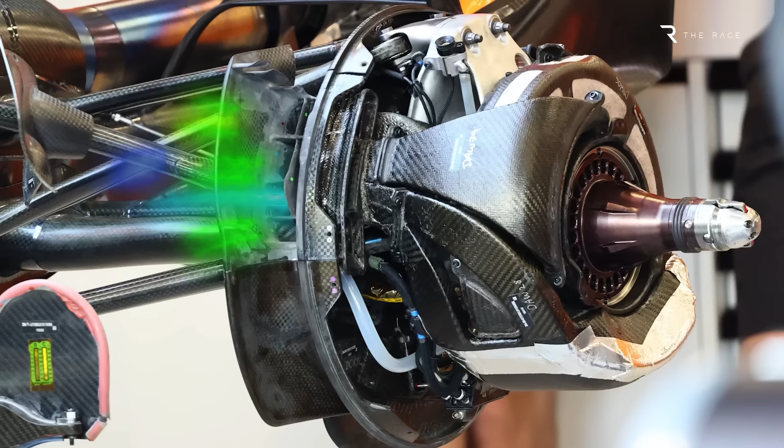Just when we thought it was case closed over McLaren's ingenious but legal brake system design, there's now been a fresh flare-up in its ongoing battle with Red Bull over exactly how McLaren manages rear tyre temperatures better than anyone else. This latest chapter has exposed for the first time some of the wildest theories that Red Bull has come up with to explain what McLaren is up to.

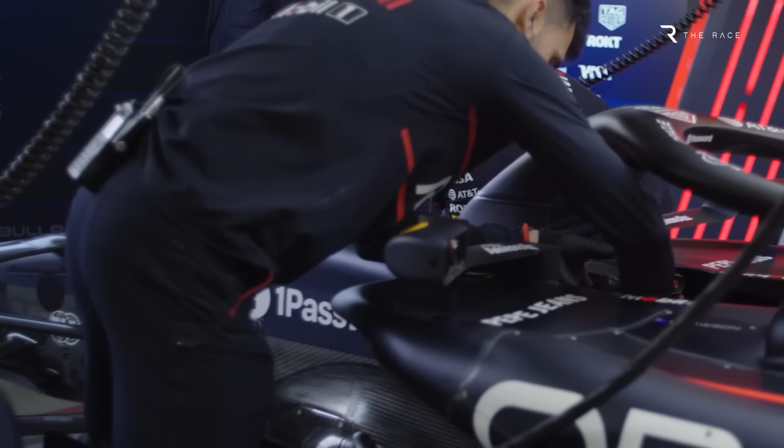But now, amid the chase for answers on what exactly McLaren is doing, one fascinating use of technology has not been immediately ruled out as illegal by the FIA.

The chase for answers about why Red Bull beat McLaren at its own game at Imola has taken a fresh twist, with it now emerging that the FIA issued 2 of its advisory technical directives in the days leading up to the Emilia-Romagna Grand Prix.

Red Bull insiders think it's no coincidence that the FIA's intervention in clarifying how it interprets the rules came ahead of a weekend where McLaren's form appeared to fall away.

But McLaren sees things differently, insisting the car it ran at Imola was not impacted at all by the TDs the FIA issued. McLaren feels rivals are mistaken in thinking it has some magic bullet solution that's made the MCL39 such a potent force in F1. It's repeatedly stated any advantage it has this year is simply down to good engineering.

The pre-Imola technical directives covered 2 separate areas. One, clarifying the materials and mounting of the skid blocks so teams can't circumvent the probe tests used to measure the depth of the plank after races.

You may remember this flared up quite a bit in mid-2022, and there have been several exclusions for excessive plank wear since, most recently on Lewis Hamilton's Ferrari in China.

Quite who this TD was aimed at is unknown, but any team exploiting the skids would have had to raise their car up for Imola. Senior sources at McLaren were clear they weren't forced to make any changes to their car, nor the way it was run.

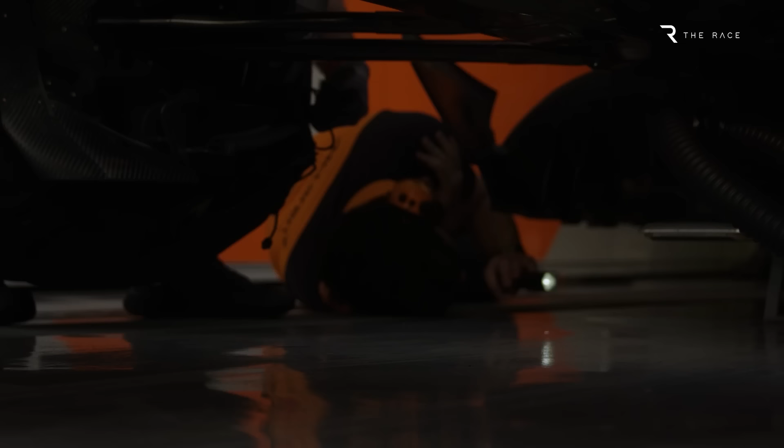Of greater interest and more significance in terms of the season-long attention there's been on McLaren's advantage in controlling tyre temperatures was the second Imola TD.

This document was different to the skid block one in that it didn't offer any formal guidance or changes to previous advice about how the governing body would interpret the current regulations.

Instead, it was the publication of a communication between the governing body and Red Bull relating to some questions posed by Red Bull about devices and procedures that could potentially be allowed to help with tyre cooling.

This type of dialogue between teams and the governing body, where ideas are suggested only to be ruled out, is frequently used to smoke out concepts that rivals could be using to exploit grey areas in the regulations. With the FIA often publishing to all teams its guidance under such circumstances, this effectively becomes a formal notification about systems or procedures which the FIA feels teams would not be allowed to run.

So, by Red Bull querying design ideas that it would like to introduce and being told no, this effectively stops any other teams continuing to run any similar system if that's what they've been doing up to that point.

It's not clear if this has actually happened, that what Red Bull has been told definitely isn't okay has changed what any other teams were doing. But Red Bull definitely has suspicions that something has changed on the McLaren since Miami that resulted in that car losing its massive advantage in managing rear tyre temperatures.

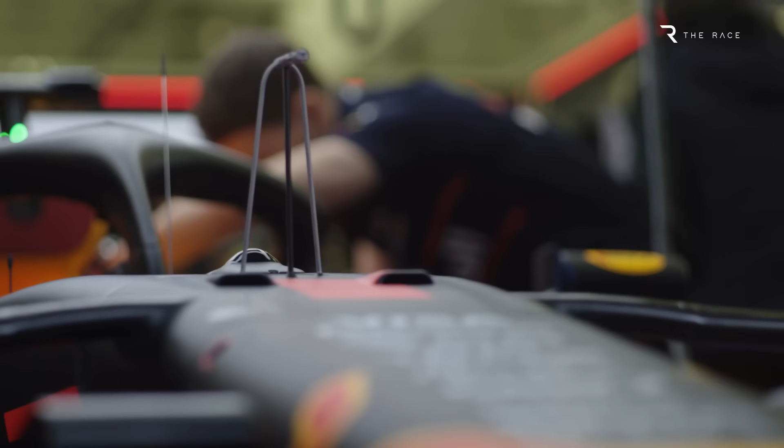The correspondence is fascinating as it offers us the first proper insight from a competitor about theories on what McLaren could have been up to and what the FIA thinks about some of these design ideas.

The Race has seen a copy of this technical directive, which includes a host of questions from Red Bull about design ideas and procedures relating to tyre cooling, plus some responses from the FIA on what it thinks is and isn't allowed. One area of discussion regards clarification about the use of gases within the tyre, and especially the circumstances by which teams can switch out the Pirelli-supplied air.

The FIA allows, through a combination of the technical regulations and previous technical directives, just one exchange of gas. Questions are asked about teams doing this exchange from one of their own reservoirs, taken from Pirelli sources, which the FIA says is allowed. Further questions are asked about whether the rules that state any form of cooling that may affect the tyre or wheel whilst the car is in the garage or pit lane is prohibited cover what teams can do on the grid.

The idea here would obviously be for a team to exploit this and deploy some cooling tricks once the cars are on the grid that would help better manage tyres.

While the FIA accepts the grid is not explicitly mentioned in the regulations, it suggests that cooling or heating of wheels to control temperatures on the grid would fall foul of Article 10.8.4d, which outlaws anything that helps teams warm up or maintain tyre temperatures.

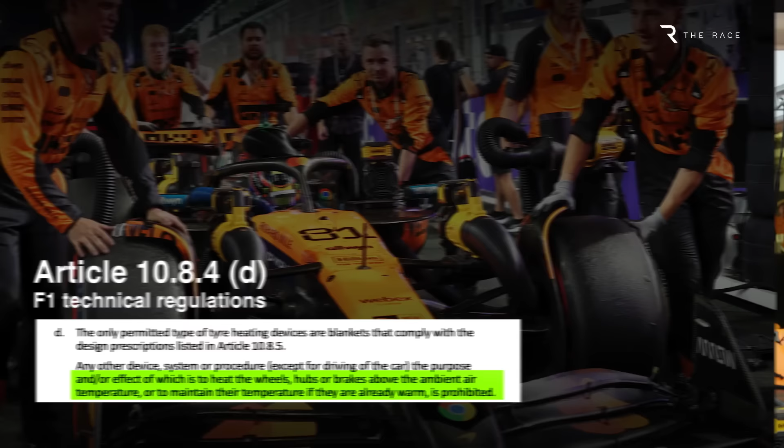Questions are also asked about teams cooling or heating their garages to influence temperatures, with the FIA stating it will not ban the use of air conditioning devices to maintain a comfortable work environment. However, where it found that this activity was being used to influence tyre temperatures, then the FIA would step in.

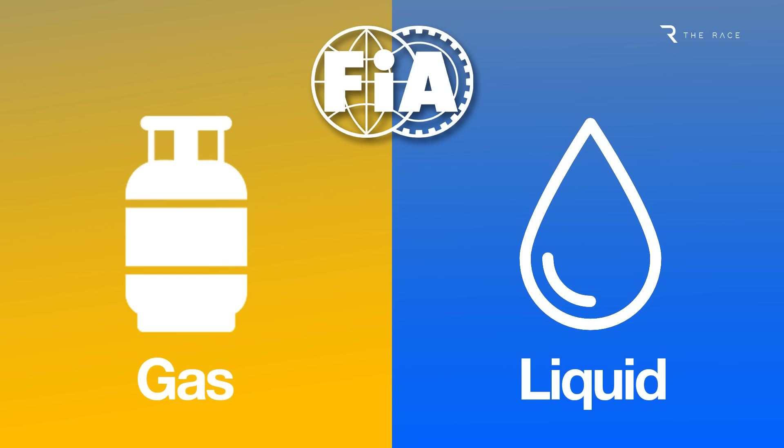Another section of this discussion involves a clarification of the use of any fluids within the wheel assembly to help better manage temperatures. The FIA divides this up into two separate topics, gas and liquid. It states that the use of gas in the wheel drums is allowed, providing the wheel design complies with the regulations and no other rules are contravened.

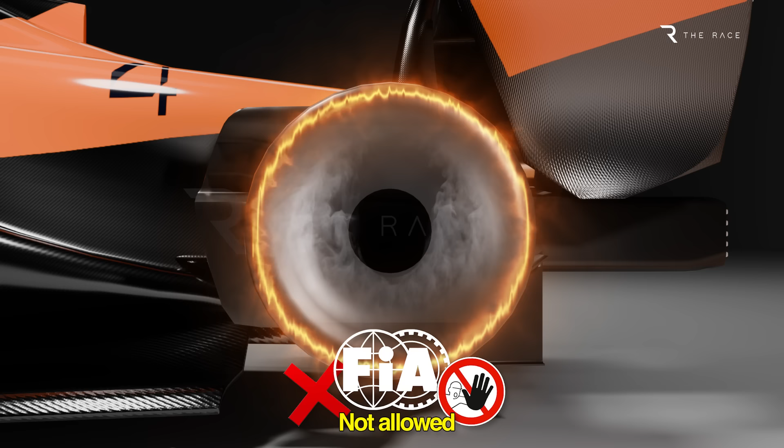However, any significant leakages of gas from the wheel drum to help cool or warm the wheel rim would not be allowed. In terms of liquids, the FIA is clear that these are not allowed to be within the wheel drum, with the exception of the brake's hydraulic systems.

The most fascinating part of this correspondence between Red Bull and the FIA is some of the design ideas put forward as ways that could potentially help with managing tyre temperatures, most of which refer to some kind of liquid being used or transferred to the wheel assembly to aid cooling. Here, we can reveal these suggestions for the first time.

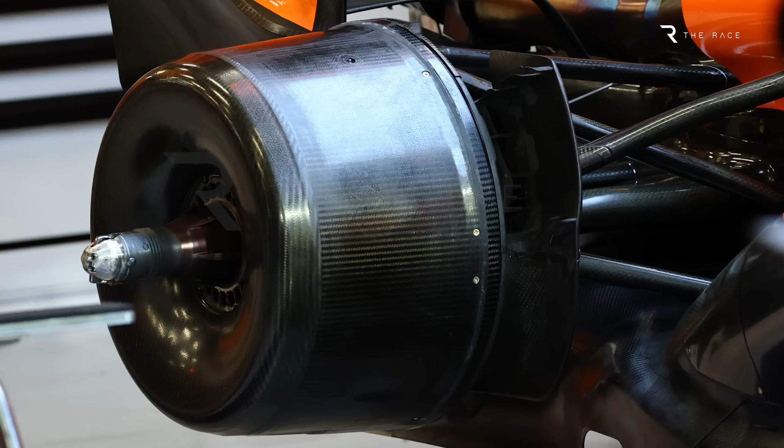Fluid-filled skins in the wheel assembly. One idea is to enclose a cooling fluid within laminate skins of the wheel bodywork. There would be no duty of the team under the technical regulations to explain the purpose of this fluid, but it would essentially be there to effect the heat transfer between the skins of the wheel bodywork.

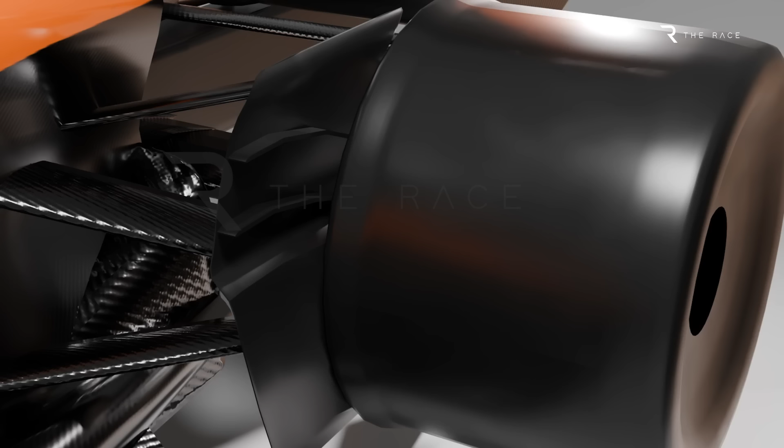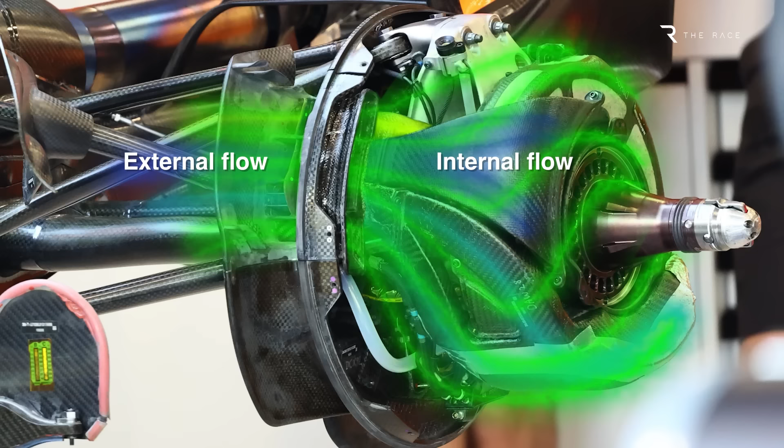The idea is that the current F1 technical regulations that detail the size and shape of components include inlet or outlet ducts for the purpose of cooling, up to the components they are intended to provide cooling for. Such ducts consist of surfaces in contact with the airstream, external flow to begin with, and then internal flow. Therefore, the interpretation of the rules has to be that any volume between these surfaces forming ducts is not in contact with any airflow and is therefore not bodywork, so can be filled with fluids.

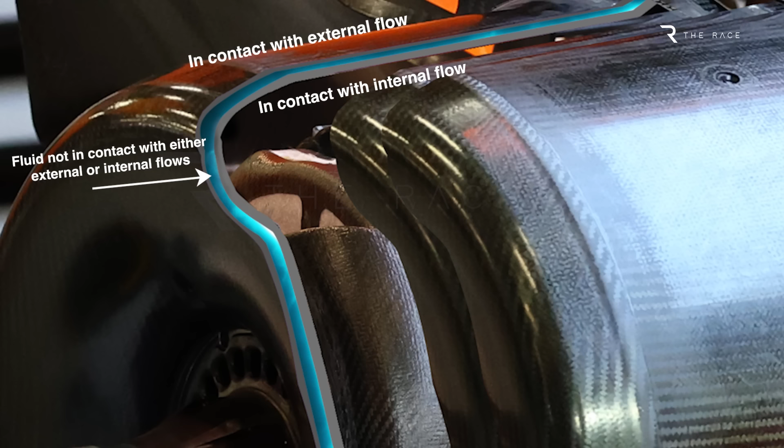The argument then would be that any fluid trapped in such a volume is likewise not bodywork and may perform a function of heat transfer by conduction without the liquid moving, so would not breach the requirement for wheel bodywork to be rigidly secured to the upright. The ducts would also be impervious to trap the fluid and comply with rules regarding aerodynamic influence. I guess we could loosely call this wheel bodywork water.

But the FIA said it would consider such a device illegal on two grounds, assuming that by fluid the idea meant liquid. The first is that it felt this would be a breach of Article 11.5 that states liquid cooling of the brakes is forbidden. Plus, it felt that it may contravene Article 10.8.4d, which states that tyre blankets are the only things allowed to heat tyres, and nothing other than the forward motion of the car being driven is permitted for heating the wheels, hubs or brakes, or maintaining their temperature if they are already warm.

It was also queried whether a team could make use of an allowance in the regulations for minimal incidental leakage by letting the fluid pass through the carbon fibre laminate. This leakage could either flow into the airstream or onto mechanical components with the aim of boosting cooling. On this front, the FIA again said a firm no.

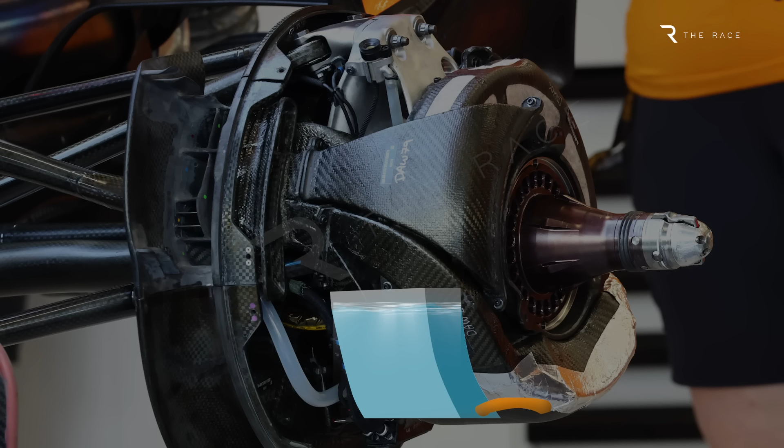A fluid reservoir within the wheel bodywork. The idea here would be to have a reservoir of cooling fluid that would be held within the wheel bodywork, which could then be deployed to help with cooling. The fluid could then be transferred to a wheel bodywork duct via a pipe with the feed generated by the car's acceleration and momentum.

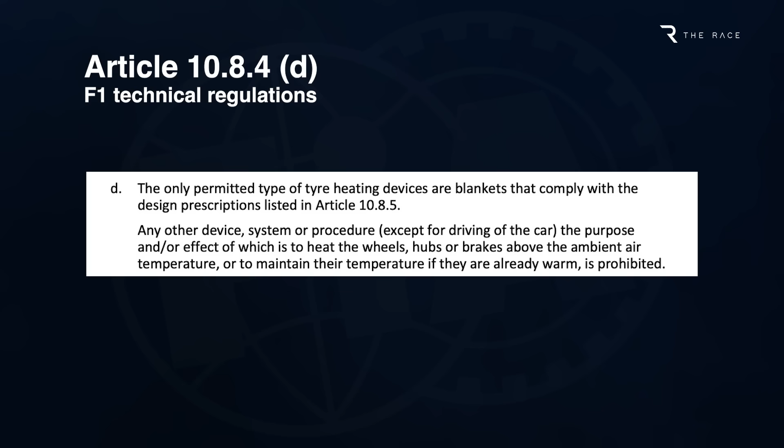The FIA deemed that it would consider such a design illegal because it would be considered liquid cooling of the brakes, falling foul of Article 11.5, and may also contravene Article 10.8.4d regarding the banning of systems to help control tyre temperatures.

A separate suggestion that made use of the liquid passing through the laminate thanks to the laminate being incidentally porous, i.e. full of small holes allowing liquid to flow into the airstream or onto mechanical components, was also dismissed by the FIA on the same grounds.

Fluid hidden in mechanical components. This idea is similar to the concept of having a reservoir for cooling fluid within the wheels, except this time it would not be a standalone element. Instead, the fluid would be stored within a component defined as being associated with mechanical functioning of the car, before being transferred to the wheel bodywork to help with cooling.

The design could be made in such a way that the fluid would pass directly from the mechanical component it's housed in to the airstream within the wheel bodywork, or through incidental leaking.

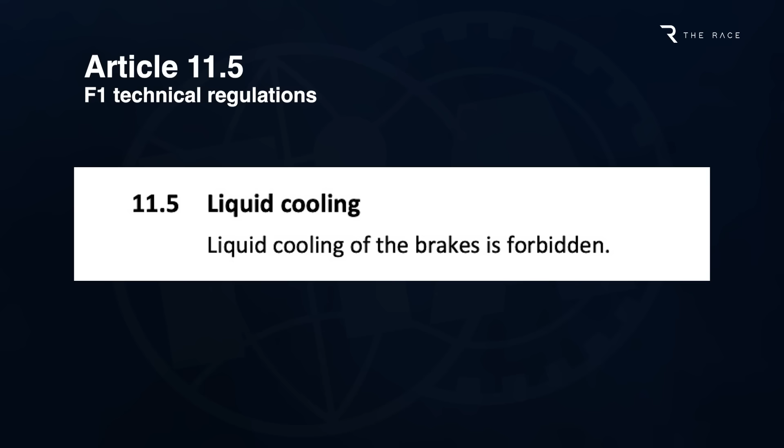The FIA ruled this one out on the same grounds as before: illegal liquid cooling of the brakes, and it being a system that could help maintain tyre temperatures. A different system was also suggested whereby the cooling fluid was simply transferred from one mechanical component in the wheel bodywork to help cool another mechanical component.

This again was deemed illegal on the same grounds as before. The drinks bottle trick: one of the more intriguing suggestions was to use a system whereby the fluid stored in the driver's drinking bottle is used to help cool the wheel bodywork. As F1's rules don't currently state that any fluids within the driver's drinks bottle are exclusively for the use of the driver, the exploitation of the reservoir allowed for this fluid is in theory permitted. The idea would be that the drink system fluid would be piped to pass directly into the airstream within the wheel bodywork to help influence cooling.

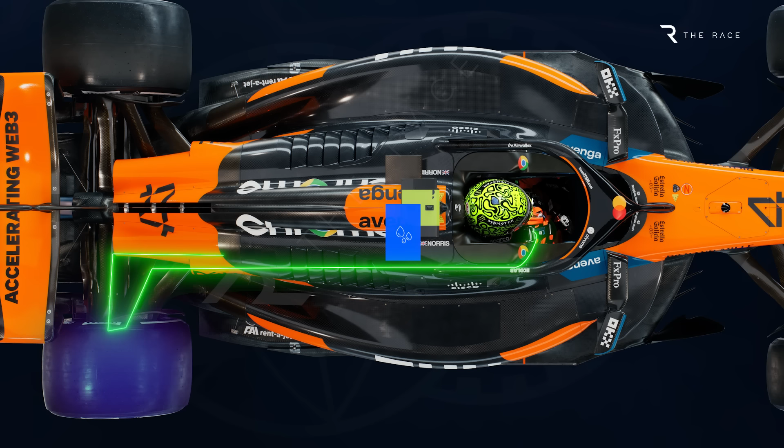An alternative idea would be for the liquid to be piped to the driver through the wheel bodywork, but then incidentally leak. This could quite literally be called tyre water, perhaps of the variety Zak Brown was spotted drinking on the pit wall in Miami. This leakage could either go directly into the airstream or onto mechanical components, with the aim of further enhancing the cooling effect. The FIA's response is that irrespective of whether or not the liquid is stored within the wheel bodywork or is sent there, it would still be considered liquid cooling of the brakes, so would contravene Article 11.5 and also most likely 10.8.4d.

Thermoelectric cooling. While all the concepts involving liquid cooling of the brakes and wheel bodywork were declared illegal, one other area of interest has been suggested, and intriguingly, not all of it has been instantly dismissed by the FIA. The idea would be not to use a liquid at all, but to create a design that featured thermoelectric cooling. Such devices are mentioned in Article 15.4.1 of the technical regulations, which outlaws shape-changing materials that some suggested could be employed within the wheel bodywork, but these are actually illegal for use in wheels.

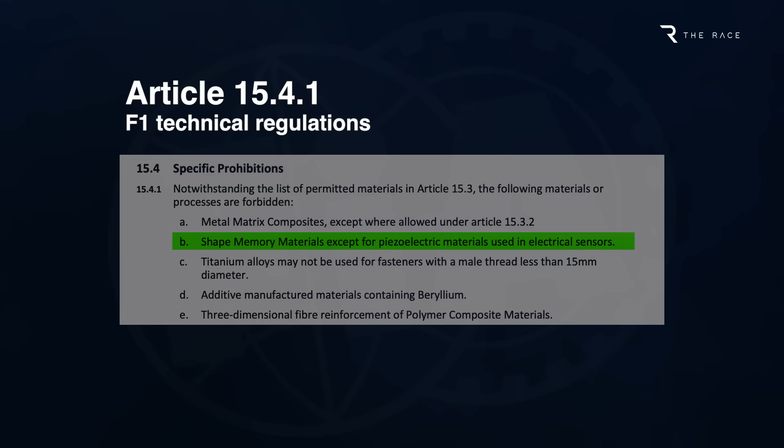In the list of materials that are banned totally in F1, the rules include shape memory materials except for piezoelectric materials used in electrical sensors. Piezoelectric materials are substances that generate an electric charge when subjected to mechanical stress, or conversely, change shape when subjected to an electric field. So in theory, a design could be created that would use such piezoelectric materials to help cool electrical sensors within the wheel bodywork, and therefore have a secondary influence in helping keep a lid on the wheel bodywork temperature.

The FIA's response here doesn't follow the previous pattern of it being outlawed as something that could help maintain tyre temperatures. Instead, the FIA said it would only consider such a device illegal if it made such drastic changes to the system the sensors were measuring that it could be considered an actuator.

A separate suggestion of using what is known as a Peltier device in this area has also not received automatic pushback. Peltier devices are solid-state thermoelectric modules that can be used to either heat something up or cool it down. They make use of an electrical current flowing through two dissimilar conductors to trigger heat to either be emitted or absorbed at the junction of the materials. By making use of electrical currents, the square or rectangular blocks that make up Peltier devices can be attached in areas where either cooling or heating is required, and you can switch between the two by changing the electrical current.

So, with reference to the quest to reduce temperatures inside the wheel bodywork, a design could incorporate having such Peltier devices fitted somewhere within the assembly that could then be used to cool things down or even heat things up. With there being no moving parts on a Peltier device, it conforms to the technical rules that require everything to be rigidly attached to the upright.

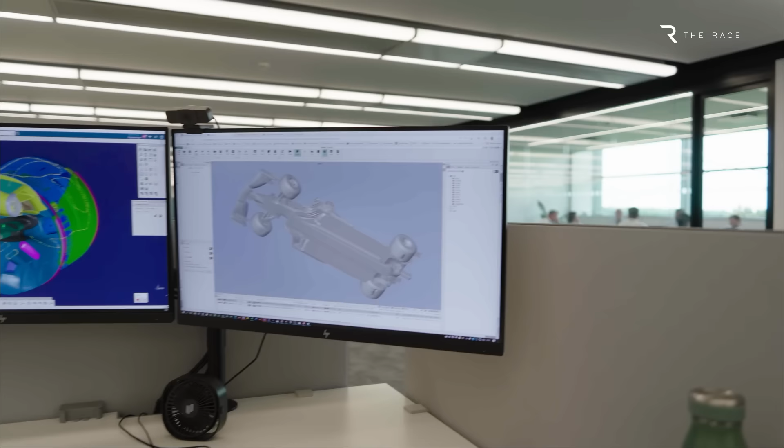So, while the FIA said it would not especially like teams doing it, F1 designers don't operate in a world where they simply try to please the governing body. They are more interested in making their cars go faster. Whether or not such Peltier devices could be incorporated within wheel bodywork in such a way to both fully comply with other regulations but also help with cooling is something only F1 teams will know, but the FIA's stance will certainly have triggered them to get their thinking caps on.

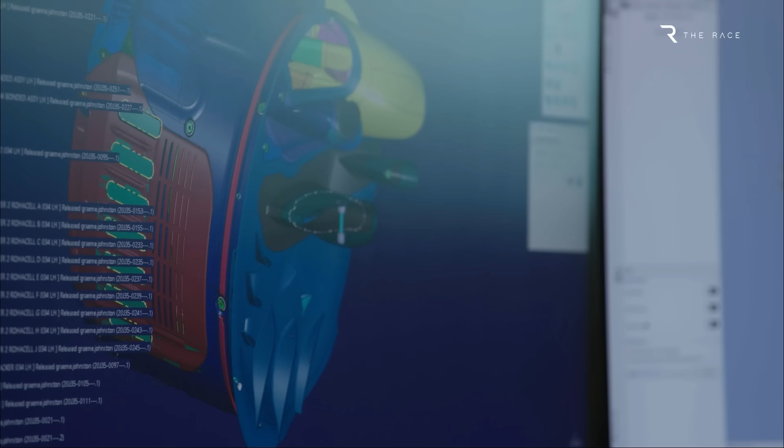And despite the FIA having given McLaren's own wheel assembly and brake system the all clear after multiple inspections, including a specific check after the Miami Grand Prix, it would appear its rival's quest for answers is far from over.